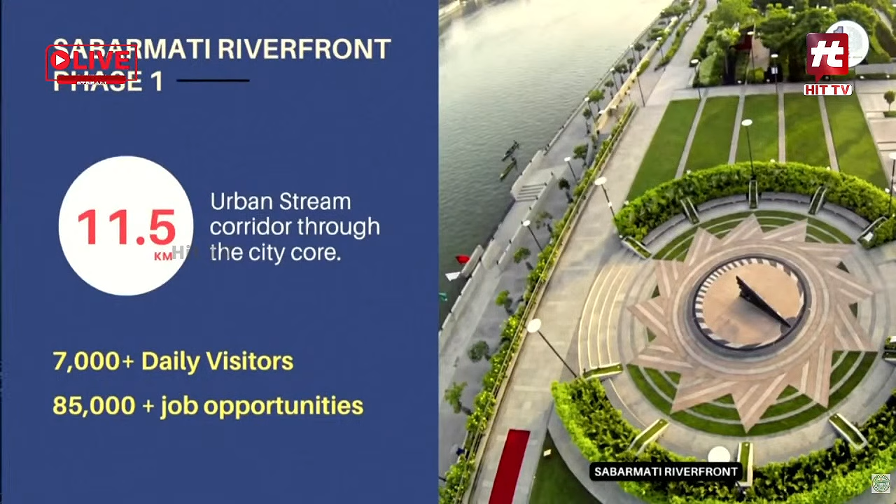Seine River: 40 million annual visitors, 29 kilometers, and 7.4 million job opportunities. 30% of the economy is driven by tourism. This is very, very important. See, Paris, everyone knows tourists go there. The Eiffel Tower is on the river Seine. So here, if we have something of that kind, global tourists can also come in, not only domestic tourists. Sabarmati riverfront also, 11.5 kilometers, now it is shaping up, 85,000 plus job opportunities created.

So this is exactly where we are. Cities around the world are turning. They are shaping up their rivers and riverfronts into economic powerhouses. Why not we? What could 55 kilometers of fully realized riverfront unlock for Hyderabad? I am just trying to put this in your minds and in everybody's mind. If those countries can do so much economic activity, job creation, tourist attraction, and thereby economic growth, with a smaller extent of riverfront, why not Hyderabad now? Why should we not take that advantage? That's exactly what the Honorable Chief Minister and the state government think.

So then we studied and prepared the master plan. The master plan is in 2 phases. Phase 1 is for 21 kilometers, and the 55 kilometers master plan also. I am trying to show how we are proceeding further. I'm now switching to the technicalities. I will try to touch upon some of the technical things here.

Sir, I think I can have the time, sir.

So 55 kilometers is divided into 5 zones. Based on the population and the river stretch, these zones are identified. If you see zone 1, from Gandipet, that is Osman Sagar, and this is Rajendra Nagar, where Himayat Sagar is. There are 2 rivers, one is the Musi River, another one is the Esa River. Both put together make 21 kilometers, and thereafter it becomes a single river called Musi.

It flows in zone 2 up to Purana Pul, 6 kilometers; from Purana Pul to MGBS it is 4 kilometers; MGBS to Uppal 8 kilometers; and from Nagole to Gowrelly exit of the ORR on the east side is about 16 kilometers. So this entire stretch is 34 kilometers and this is 21. That's how it is a 55 kilometers vision. So why is this zoning considered? This is the new development that is happening. This is the old development in zone 2 and zone 3, zone 4 is a semi-growing area, and this is the future growth corridor, we can say.

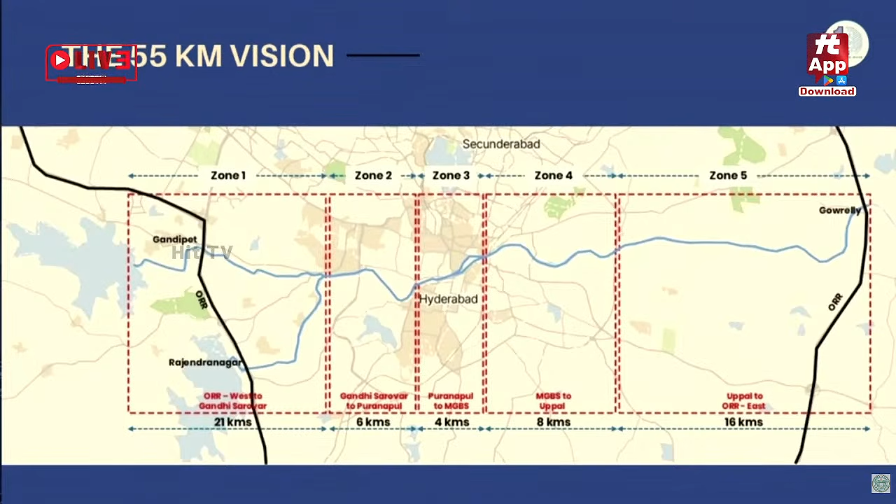So, having said this, as the Special Chief Secretary sir also mentioned, we have engaged global consultants. Meinhardt is the main consultant, from Singapore, with a lot of projects done in Singapore, and the designer company is from the US, and Cushman and Wakefield is known as one of the big consultants. They will work on the economic models and other things. These three have become a consortium, and they have given the master planning for phase 1, and they are doing phase 2 as well.

Master planning components: what is there in the master plan? The master plan is not just about the DPR. People often have a misconception that the DPR is the final thing, but first we need to have the master plan. Then out of that the DPRs can be generated. This master planning is, as I said, data collection and data analysis, then the plan, then we go to implementation. Now we have entered the plan stage, planning is happening, and phase 1 is already completed.

In this blue master plan, green master plan: the blue master plan is protecting all the water bodies and making the water flow without any contamination. The green master plan is improving the greenery along the MUSI and also in Hyderabad, because these days we are also experiencing drought conditions. Unless we target the greenery also... this is also very, very important.

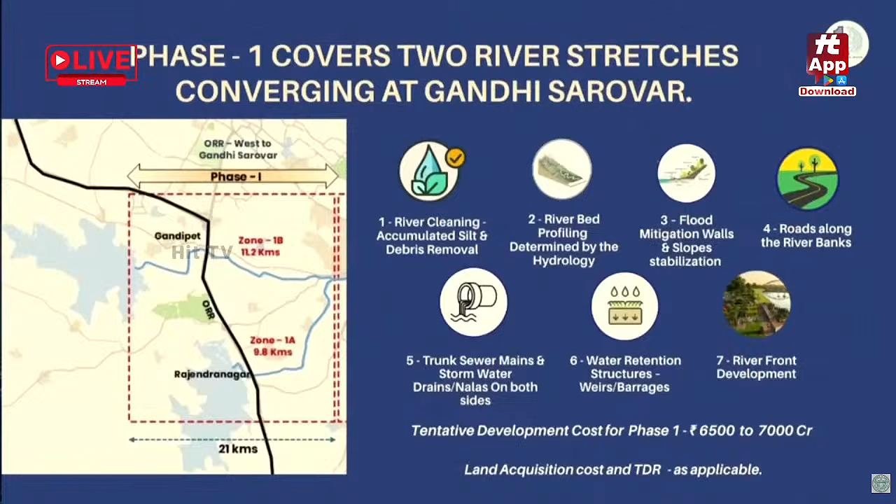So understanding the river is very, very important. Unless you understand the river, what the flow of the river is, you cannot plan it. It is haphazard planning and it cannot sustain. When we talk about sustainability, we have to understand the science, safety and hydrology of the river. We have studied extensively the overall catchment area of these 2 reservoirs. The Osman Sagar reservoir catchment area is 740 square kilometers. It starts from Anantagiri and comes up to Osman Sagar, Gandipet. And for the Himayat Sagar reservoir, the catchment area is 1362 square kilometers. This starts at Pagi and comes up to Himayat Sagar.

The blue one is the Gandipet one, and this green one is Himayat Sagar. You can see Himayat Sagar here and Gandipet here. This is the catchment area. So whatever rain falls there comes into these reservoirs; that study is also there. Catchment area map of downstream nalas: after the reservoirs, this is the entire core area now. In this, how the nalas and the catchment, the drainage pattern we call it, is entering into the river, this is also studied.

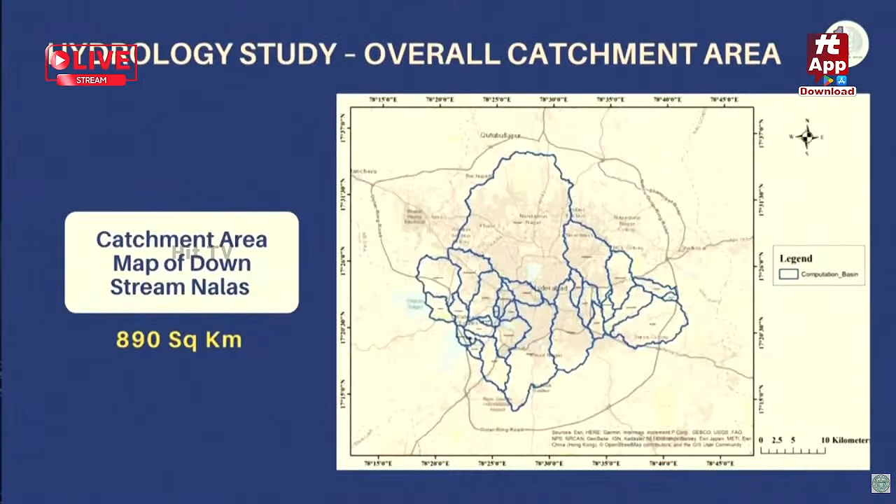Then this is very, very important for all of us. Given the situation of the river, if we leave the river like this, why are the floods happening? If the river is left like what it is today, the study was done through two simulations, one is HEC-HMS and another one is HEC-RAS.

What is this HEC-HMS? This is the Hydrologic Engineering Center run by the US Army Corps of Engineers. They have developed a hydrological modeling system. This is software where we run the river widths, river lengths, river flow, river hydraulics, and then that gives how the flooding happens. If you see the blue marks, if the full flow of the river comes, the flooding happens up to these places.

And this HEC-RAS is the River Analysis System. So this analysis is done in both the softwares, so that we are thorough on this. And not only this, after studying this, we have identified what should be the cross section of the river. If the river should not come outside the embankments, if this flooding should not happen, which is causing a lot of human loss or even property loss and economic loss, in order to contain this, we have to have proper sectioning.

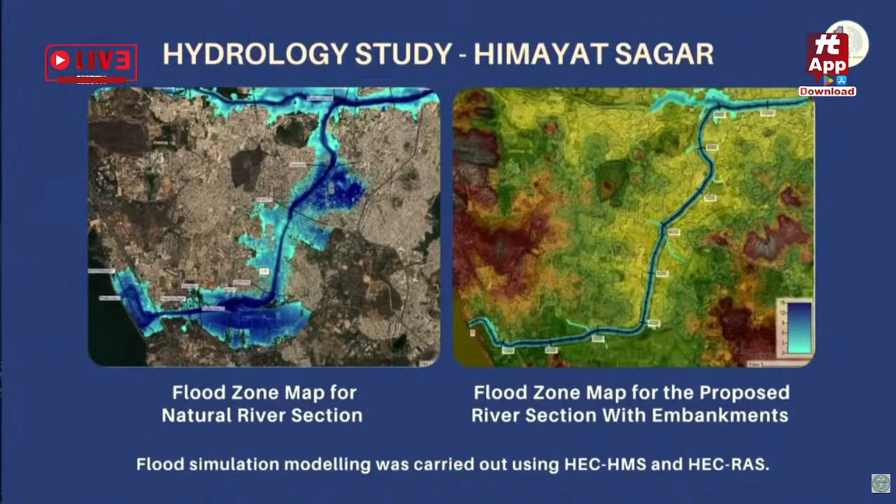This section, and this entire flow, actually if you see here, this is for the Himayat Sagar stretch, from Himayat Sagar to Bapughat, that is the Gandhi Sarovar now. Up to that, after study, this is 1.53 lakh cusecs of water. In 2025, actually the maximum flow we have taken from Himayat Sagar was only 36,000 cusecs. But this Himayat Sagar was designed for 1.53 lakh cusecs. Unless we see the downstream of the river properly and do the section, again the floods will happen.

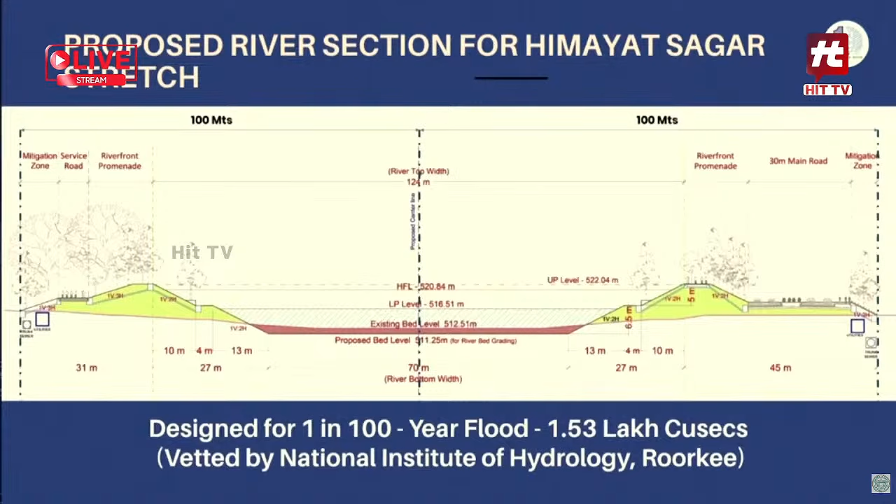On this buffer, the promenades are coming. This is called the lower promenade, this is the upper promenade. On one side, within the buffer zone, we will be having a 6-lane 30-meter main road, and on the other side only a service road of 9 meters. Most of the rest will be open spaces for the public.

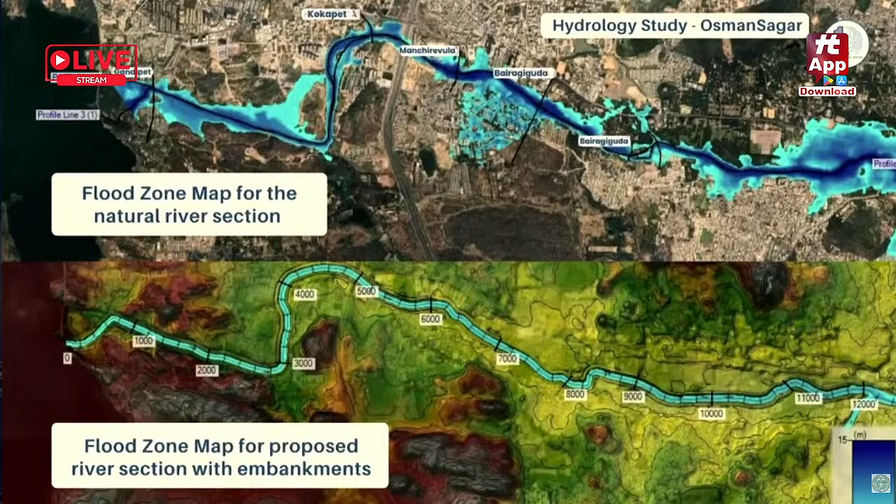And we have also done it for the second stretch. Of course, we have done it for the entire Musi, but I am just trying to show only these two stretches in phase 1. This is a hydrology study for Osman Sagar up to Gandhi Sarovar. Here also you can see how the flood plain is, and how it will be after sectioning. The bottom width of this section is 60 meters and the full flood level is 104 meters, and the rest is the same, from the middle we will be taking 100 meters on both sides.

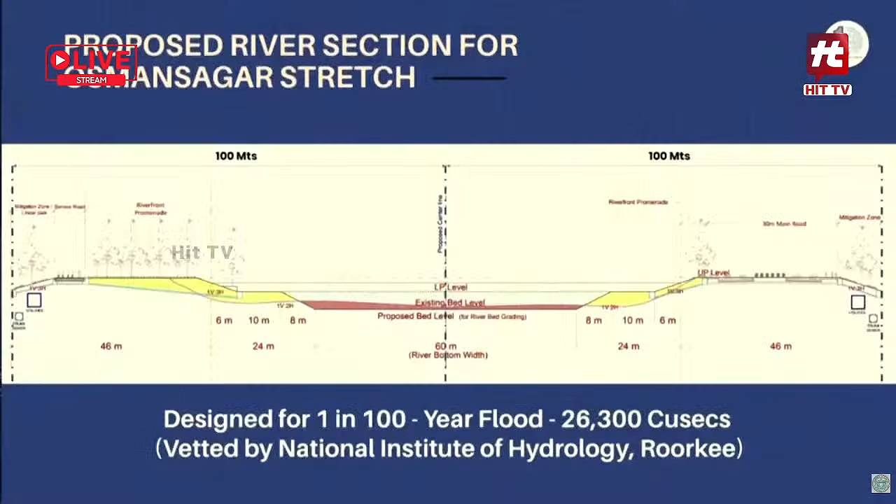So completely within 200 meters, the 1 in 100 year flood is 26,300, but it can easily take 60,000 cusecs. Even if cloud bursts happen, climate change causes are there, this will take the entire flow only in the river. It will not spill over into the floodplain, not causing any damage. So this is how the section will be. We will have a toe wall constructed, and slopes will be created so that the speed of the river is not obstructed. The river will flow.

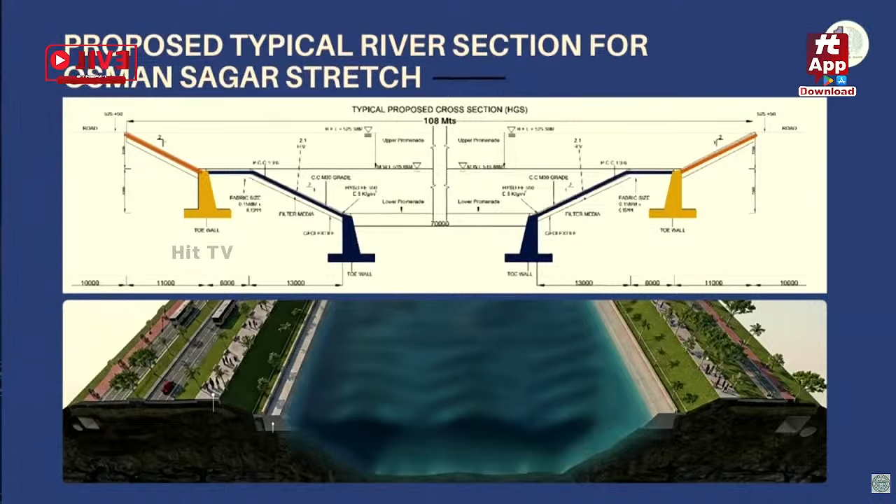This is the lower promenade and this is the upper promenade. If you see here, this is the lower promenade, and the upper promenade, this slant, we will go for greenery or different combinations. We can also use Gabion structures wherever required; if the slant slopes are not withstanding the speed, we have to go with CC, but we have worked it out for every 30 meters.

GO 168 clearly says 50-meter buffer for the river in the municipal corporation areas, and it was reiterated in 2016 by GO 7. It is 50 meters buffer on both sides of the river. This is very clear in GO 7. So, this is exactly the study. This is not from out of the blue, or the state's thing. It is as per the CWC norms.

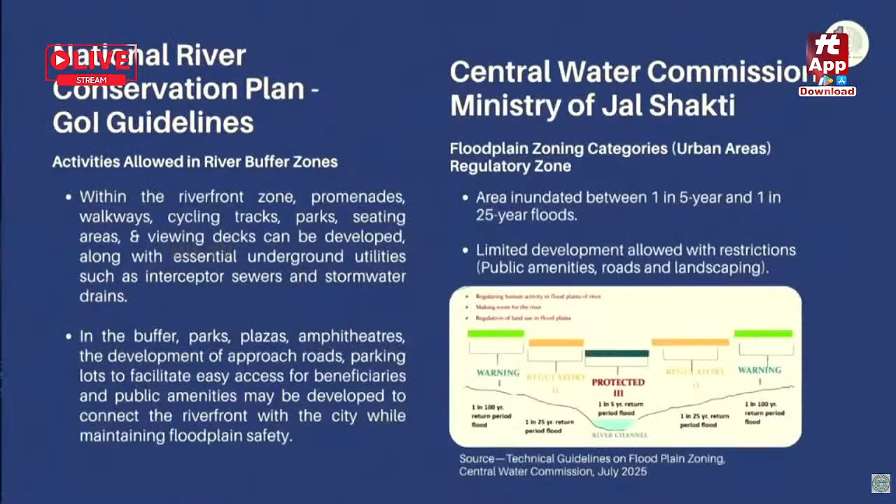So, that is a working place. Somebody can come and go. If we want to stop it, we can stop. Residential is not allowed. That is very important. People can also refer to the guidelines. Source is Technical Guidelines on Floodplain Zoning, Central Water Commission, issued in July 2025, based on various Supreme Court orders, NGT orders, and all these things. I request all of you, please do study that.

So, then we are coming to how the river will be cleaned. One is completely cleaning it. It is not possible because there will be some toxins and other things. When we have to disturb them, we have to disturb them in a proper condition. But it can happen over a period of time if we substitute that water with fresh water, the surface water. For this, a project is already taken up by the government.

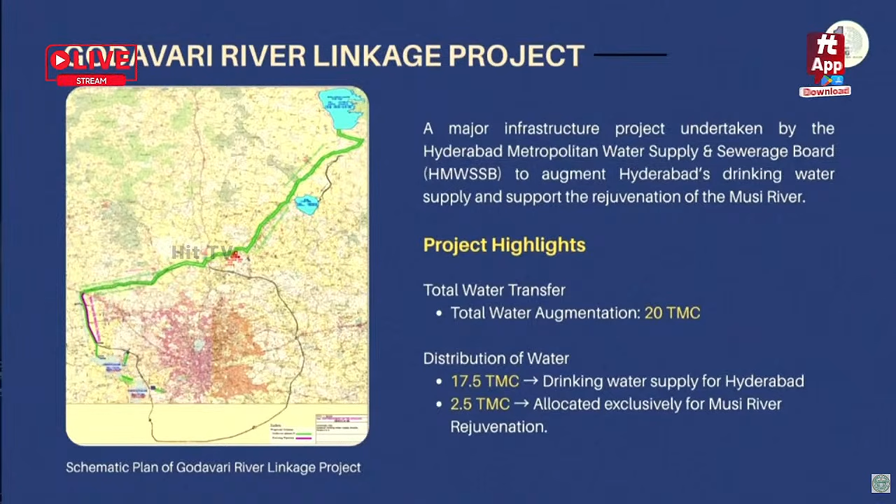This is exactly what I was trying to tell. So, in the river, all through 365 days, there will be water, the fresh water that comes from the river Godavari. So, this is the river linking project the special CS was also mentioning. So, this is one, getting the fresh water there. Then what is the second thing? Second thing is we have to treat the sewage in the entire city. Sewage treatment and trunk sewer mains. After treating or before treating, we should not allow the sewage to pass into the river.

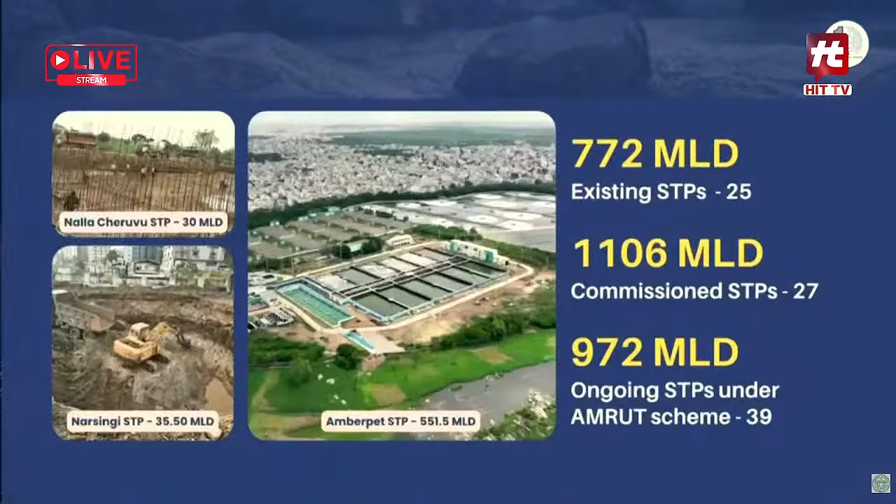So, what exactly is happening now on the sewage front? This is another very important thing. If you see, there are STPs already existing. Here a representative photo, already functional, this one Amberpet. 772 MLD existing STPs, 25 are there, and 1106 MLD already commissioned, 27, and works are going on at good pace. 972 MLD ongoing STPs under the AMRUT scheme, 39 are under progress. So, these many STPs are happening, and this is the existing one. These are the new ones, construction is already going on. In phase 1, Narsingi already started. The STP work is started.

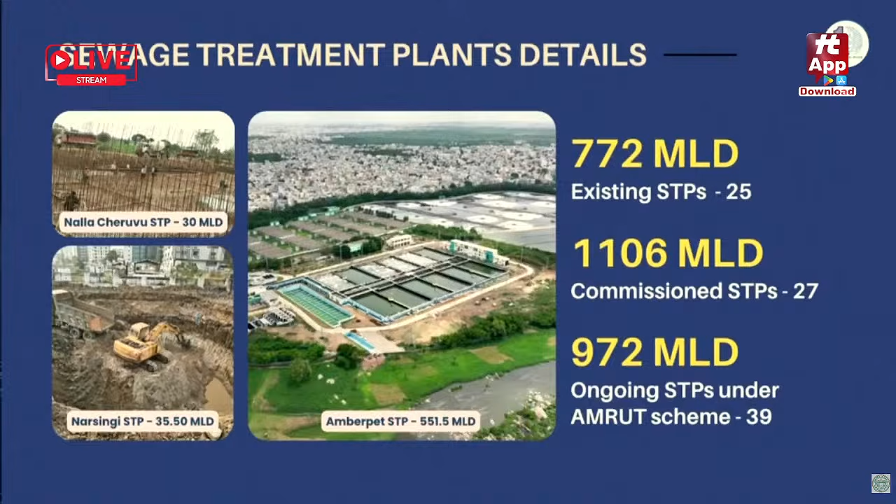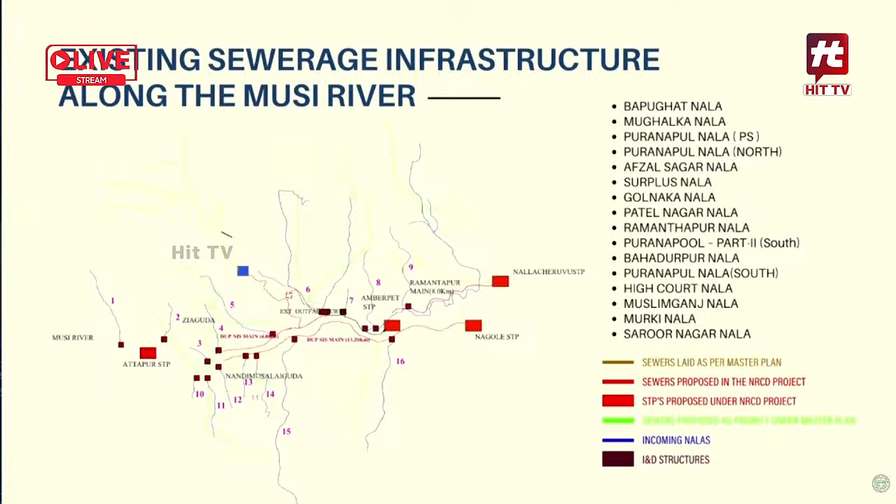And this is the part of the project where we were talking about phase 1; the sewage treatment and the trunk mains are all happening here. So this is the picture that is showing how the trunk mains are coming and how the sewage will be diverted to the STP. Here is one STP, here is one STP, another one and another one. There are 4 STPs nearby. This is treated and coming and joining in the river.

But even after that, we have to have the other side, because this is treated and it is merging. For the other side, it will come and go to Attapur. For the first time in Hyderabad, we are coming out with one underground STP as well. So the red marks are the trunk mains that lead to the STP, and this is connected.

Here I would like to just bring to the notice of the August House: earlier the diversion lines were constructed, if you see the yellow line, exactly in the Musi. So if we construct something in the river itself, it will obstruct the flow of the river. So what we are doing as part of the project, we are shifting this onto the river edge, that is, into the buffer. So that, as I was telling, we have to give the river what it is supposed to be having.

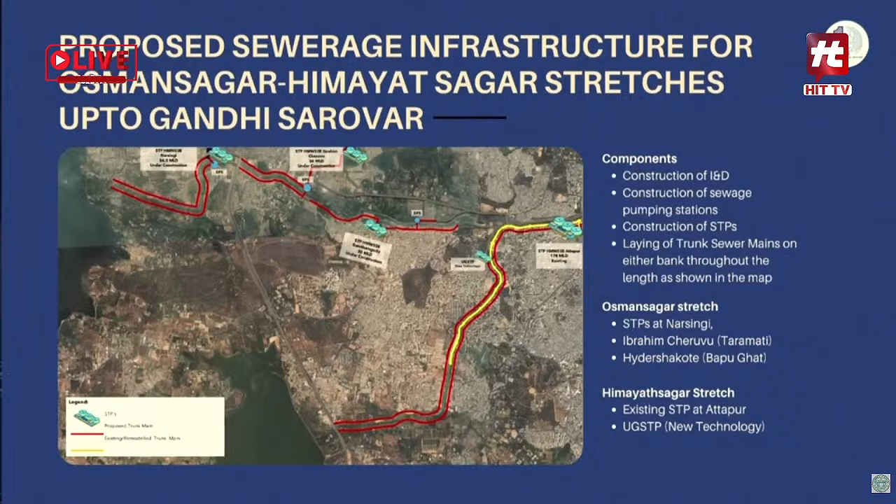Then another very big decision taken by the Honorable Chief Minister and the Cabinet is that, okay, now we are planning to have the STPs fully functional, diverting all the sewage into the STPs and treating it. Why not we treat it tertiarily? The tertiary treatment has to happen. Then use that water. We are bringing Godavari water, Krishna water, about 200 plus, 300 plus kilometers, spending so much money. That is for drinking water purposes, whereas the sewage is just left like that.

If you see the Singapore model, there they call it NEWater. That is treated sewage water that is utilized for various purposes. Why not we use it? That is exactly what the project is talking about. This is also factored in now. After treating this sewage water, tertiary treatment will be done. This water will be supplied to the industry, and particularly the data centers that are coming up.

Already the Metro Water Supply and Sewerage Board is working with TGIIC, where the industrial areas are coming up, for example, Future City and also the Chandanvelly industrial area. A pipeline will be laid. Before that, at every treatment plant, we will be having a storage reservoir. From there, it will be pumped to the respective industrial areas. Not only that, we will also be requesting all the developers sitting here that in construction, invariably, we have to use this treated water.

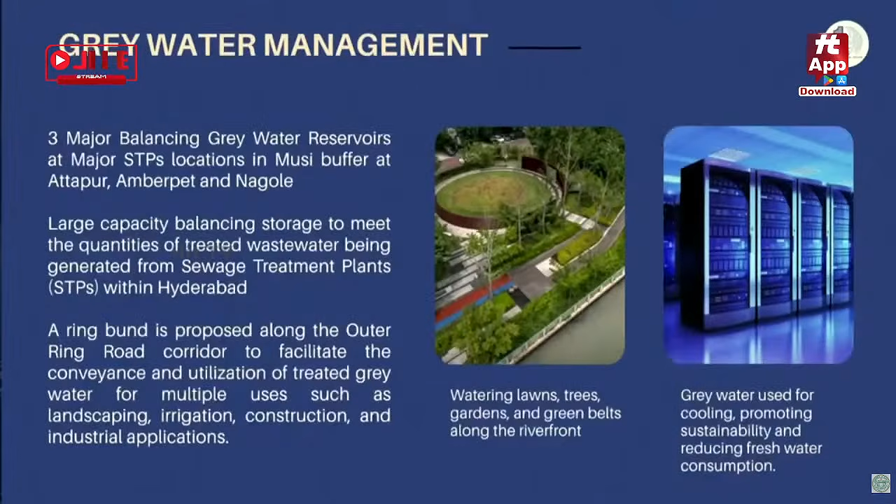In the future, the city is growing like anything, and in the core urban region economy area, we will be needing more drinking water. So this is another very good initiative that is flagged into the project.

This is the strategic mobility intervention. So as part of this, how many bridges are coming? And as I was talking about the retention of the water, there will be one barrage here, one barrage at Narsingi, another one at the Gandhi Sarovar, so that the water always remains along this river. And this can enhance tourism, the economy, activity, and everything in this particular area.

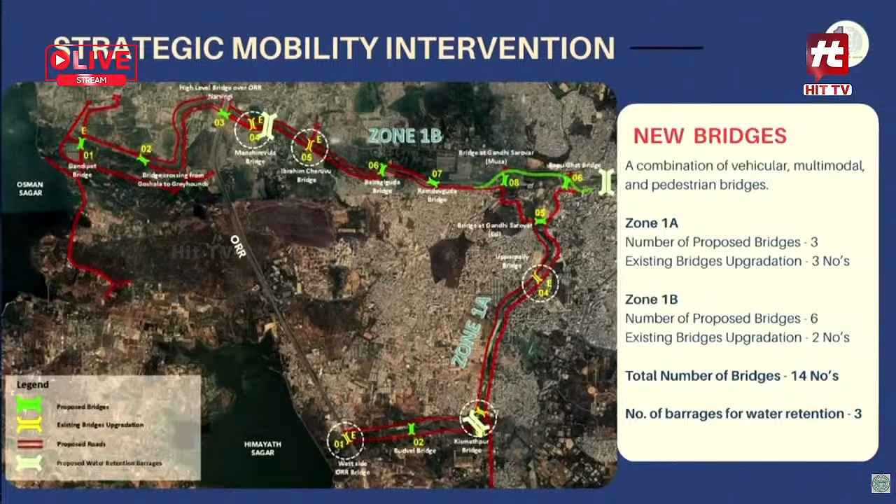A total of 14 bridges, out of which about 9 are new proposals and 5 are old upgradations. As you are aware, some of them are low-lying causeways which need to be uplifted. That is also being taken up under this. This is the entire costing; as I was showing, this is within 6,500 to 7,000 crore.

So this is riverfront and public recreation spaces. As I was talking about how the buffer zone will be used, restoring MUSI and reconnecting the people. MUSI has to be connected to the people. They are the important stakeholders in the entire project.

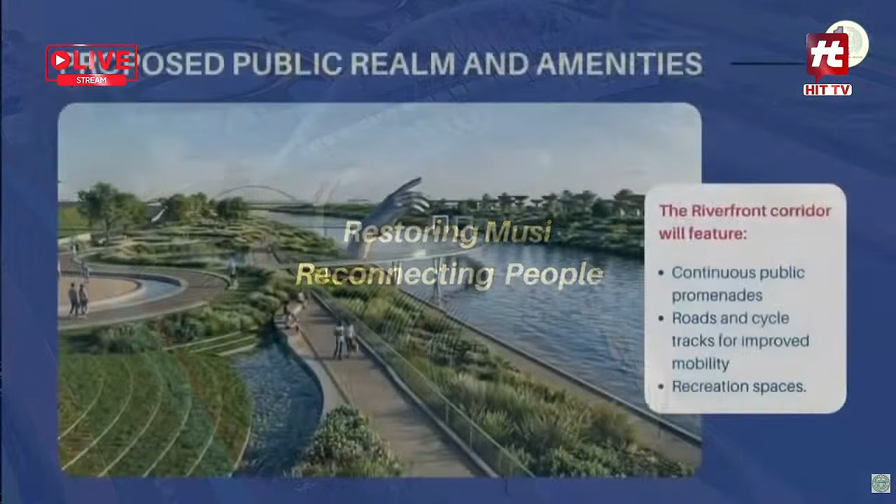See some of the renderings: continuous public promenades, roads and cycle tracks for improved mobility, recreation spaces. This is exactly as per the section I was talking about, the river section. Whatever pictorial proposal is shown now, the images shown are to scale. As per that only this planning has happened. These are the public amenities. Please play the video.

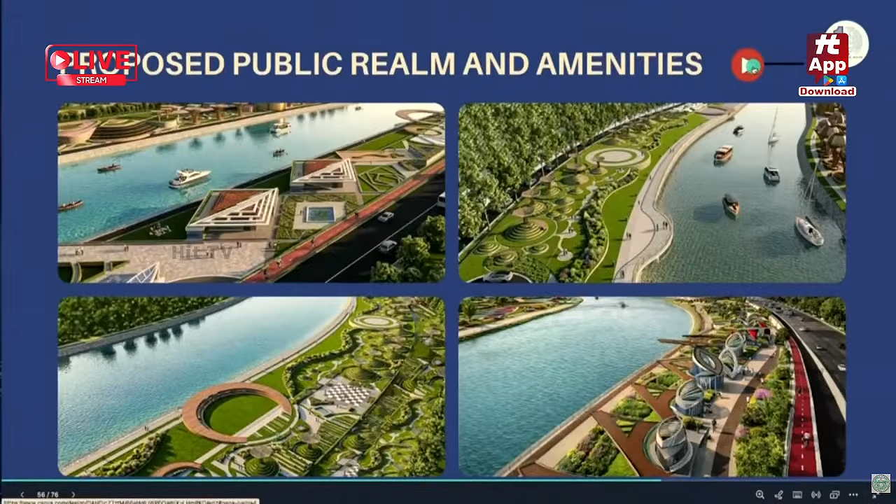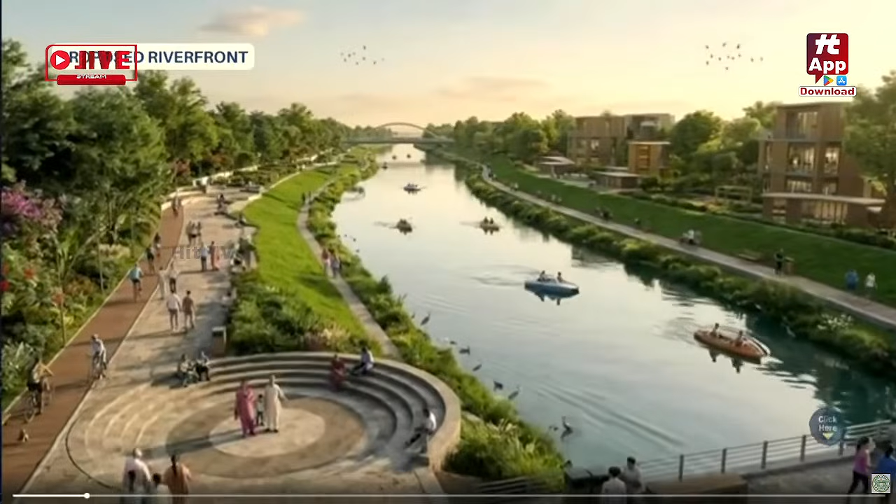A paper this way. Sridhar Babu sir, paper is this way sir.

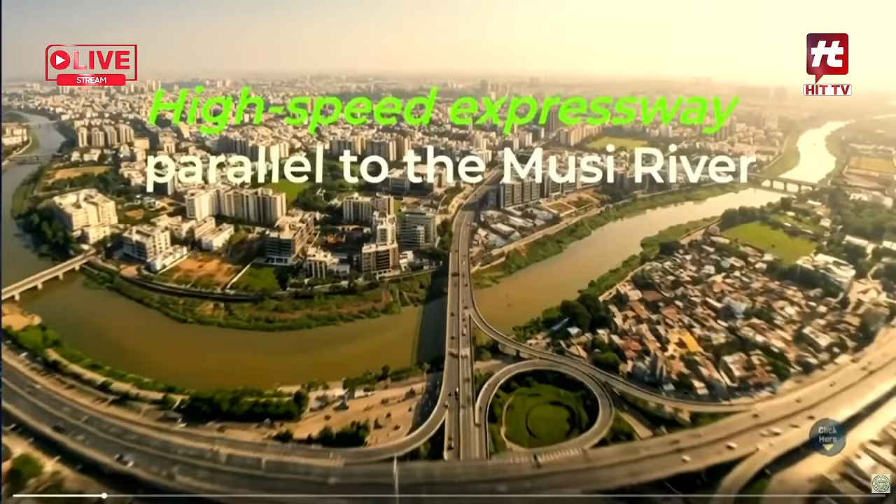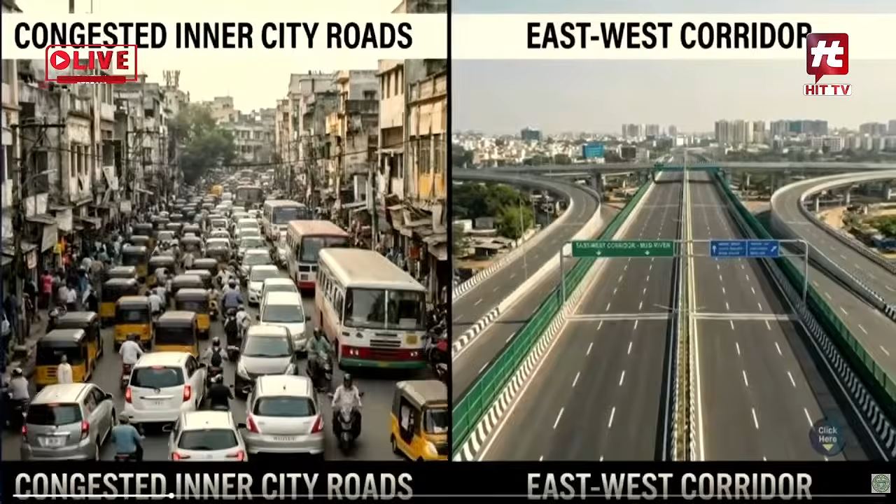This is again a 6-lane road, expressway. This connects all these highways.